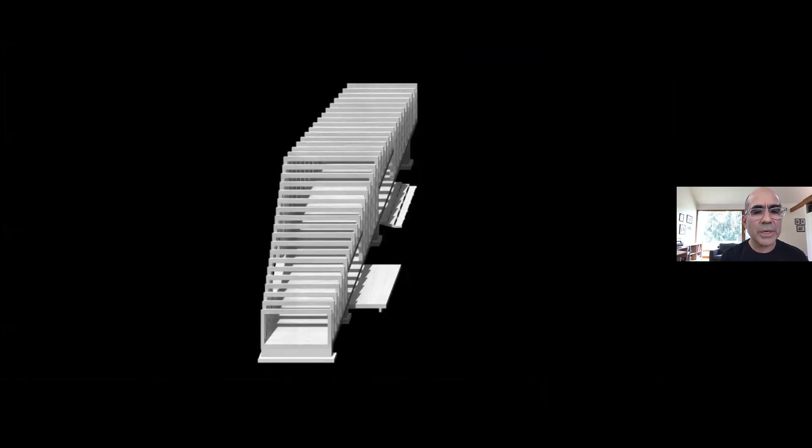View of the interior. For this project, which was on a large wooded site on the water, we were able to design a boathouse which opens up to the water. And this is a drawing of that boathouse and an interior view.

One of the wonderful aspects of working here was that there was local craft, very much because there's boat building, ongoing boat building in the area. And this was one other small outbuilding for the same project.

In 2018, I was invited as one of 10 architects by Francesco Dal Co to contribute a chapel design to the Vatican's entry at the Venice Biennale. While far from home, I sought to approach this project just as I approach all the others, starting first with a feel for the site and a sense of the locale.

We use very modest materials and an overall general modesty of approach. I wanted to design something that was very easily constructed, something that could be moved after the Biennale to the mainland. That was a suggestion that the chapels would find a new home in places of need.

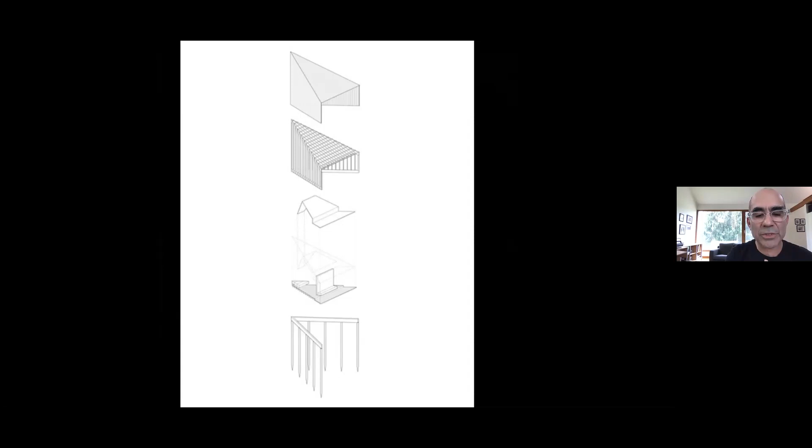The facade here is a porch, and the porch makes a public space. The porch has this long bench facing outward. The interior is a space for one to sit in the light, surrounded by darkness.

This is a view of the light coming in through the canopy of the building, but it is not visible from inside the building. And a view from the exterior with the lagoon to the right.

Earlier this year, we found that the chapels were actually protected by the Italian Ministry of Culture. They have been made permanent. They're going to remain in Venice on this site, and they're going to reopen to the public within the next couple of weeks.

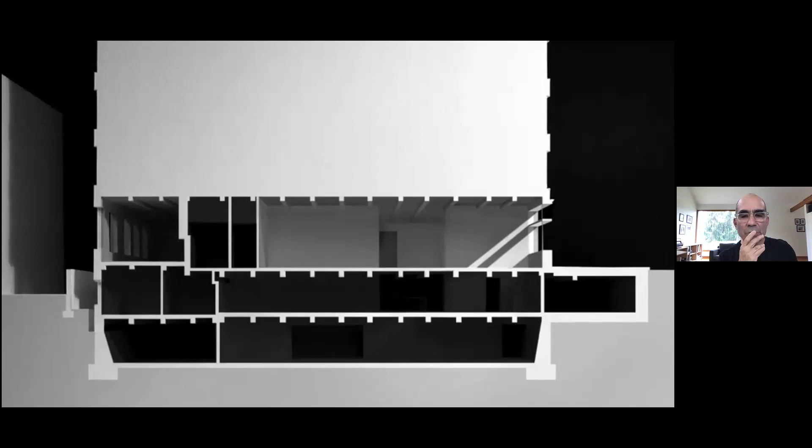With that thought, I approached the project here in a section showing the 3 floors, the ground floor at the top, and the street to the right, and removed sections of the concrete and the floor slabs to create double and triple height spaces. In the process, this allowed light to enter into the full depth of the space. And in this way, usable space was created where previously there had been no real space at all.

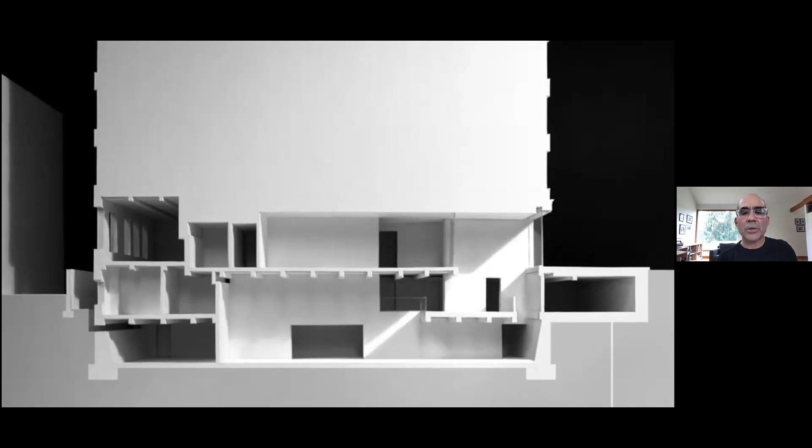This is a view from the lowest level. The space on the right is the lecture hall and workshop space. It's typically used for a lecture 2 or 3 times a day. From this space, which was about 21 feet below the sidewalk, one can look up at the street, at the sky, and engage with the city.

Our next stop is the borough of Queens. Queens is the largest borough of New York City. Manhattan, of course, is famously an island. Queens is really much more of a continent. It has the most linguistically diverse population in the world — somewhere around 130 to 140 languages are still spoken there. It's also very much a place of industry in the city, and it's culturally fertile.

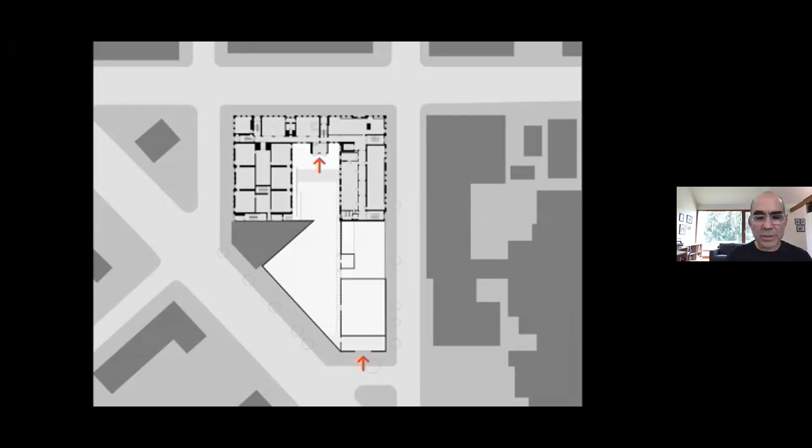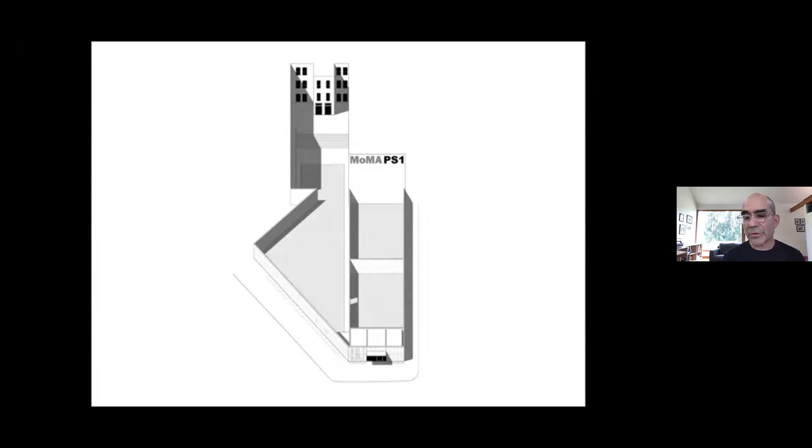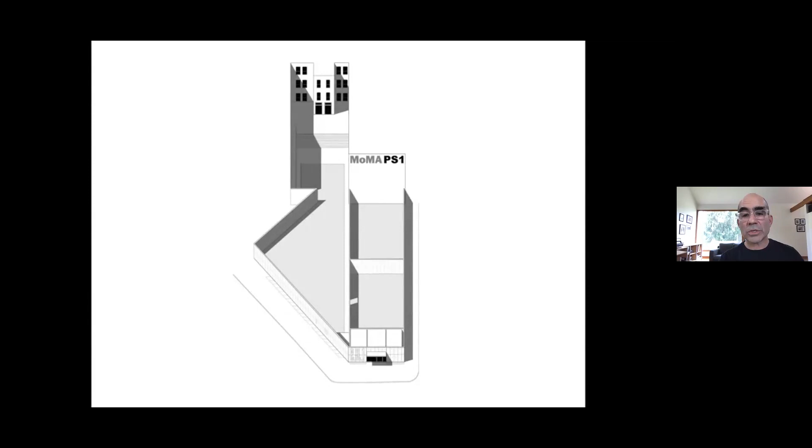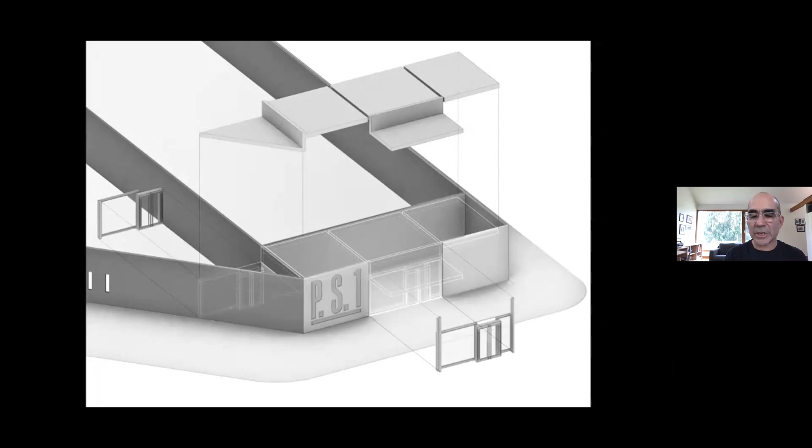This is a diagram to show what was there: a series of walls. To the walls, we cast a concrete roof, a concrete canopy, and we designed glass and steel doors to fill the gaps between the concrete walls. Here the clear elements, separate materials, come together to form a whole.

So the new entry experience was intended to be very much a densification of the actual qualities of the site, as well as a clear entry. And this is a photograph of the project completed.

The monumental glass and steel doors were designed very much with the unique programming requirements of PS1 in mind. And the large doors can be opened up specifically for book fairs and summer music festivals, where the daily visitorship might go from 100 to 600.

The natural light is the mechanism for leading one forward once entering the building, and it's what animates the very austere interior. It's a wonderfully geometric, very abstract landscape. We sited and made decisions in order to really highlight those embedded qualities that were there but not fully realized.

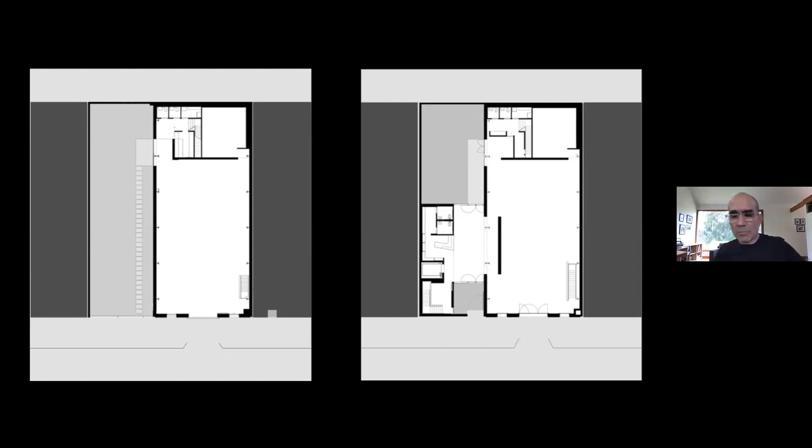The plan on the right is what we created, which was to build a small 2-story building in the lot on the left, plugging in, if you will, to the original great space. The large space was really wonderful for the showing of art, but the Sculpture Center did not have the support spaces necessary to really make for a complete museum or gallery environment.

It also did not have any of the kind of sequencing and timing that I think is important for arriving. So we took all these issues into account.

Another very important aspect of this project, as you can see in the plan on the left, was to open up and connect to the basement level, which is an incredible series of elongated spaces that were built, very purpose-built for the previous industrial purpose.

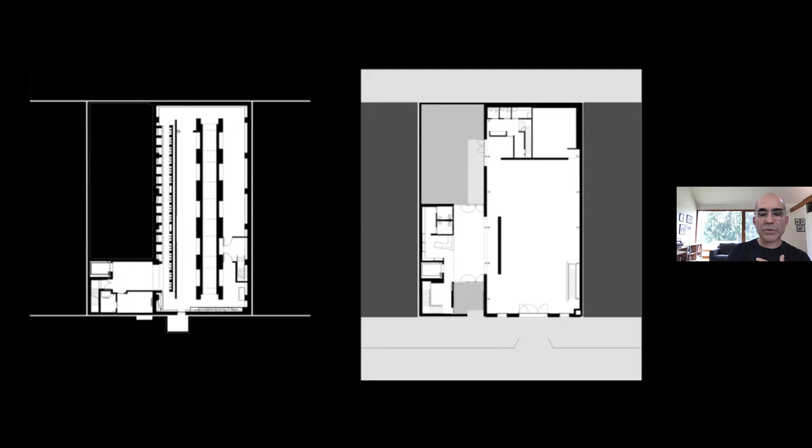So the section of the original building on the left and our project on the right, you can see the 2-story addition, how it plugs in both laterally and in section.

So the entry to the Sculpture Center is through the space between new and old. The gap is marked by the joint between 2 materials, brick and steel.

And the architecture is designed in a small space to allow for this kind of slow process of arrival and revealing of both the spaces within, and then more importantly, of the art that will be encountered.

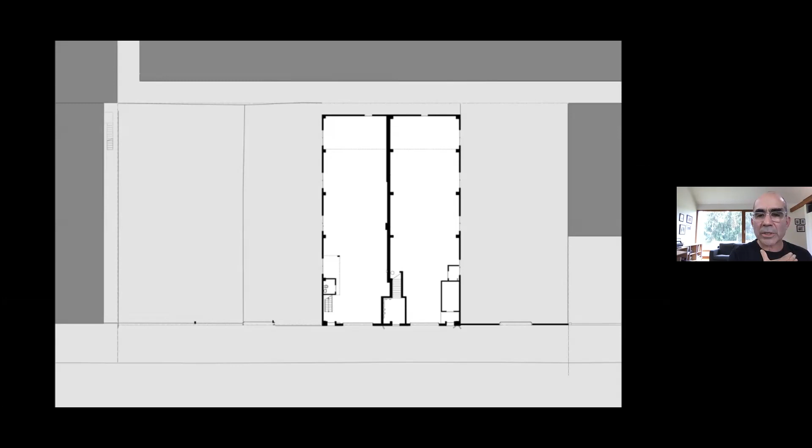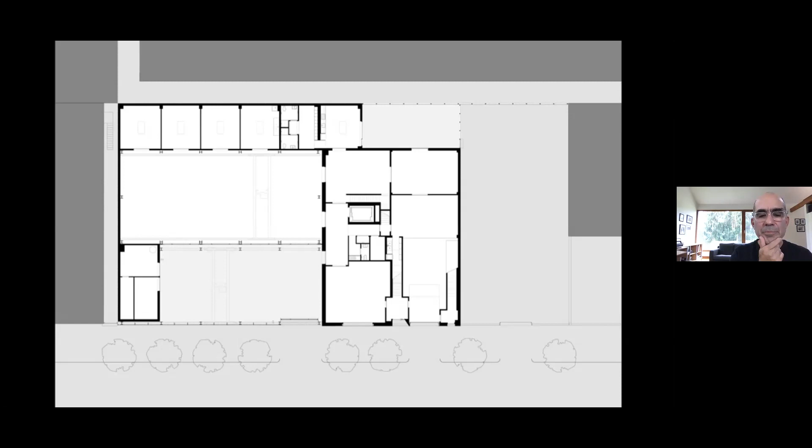In this drawing, you can see the old building in black, onto which we grafted a series of new structures. So the overall strategy here was additive, and that resulted in an assemblage of different elements that make a whole, and this whole becomes very much a part of the streetscape.

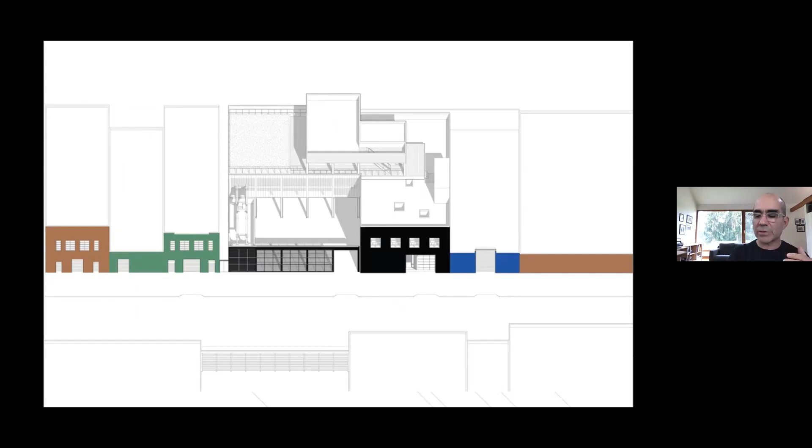This assemblage is both closed and open. Most of the local manufacturing buildings are very closed, very fortress-like, and it was important here to create a sense of visual porosity, to be able to see in and see much of what was going on.

Barry, to his credit, was very mindful of the quality of the spaces, not just for the work, but also for himself and his team, as they spend long hours doing what they do.

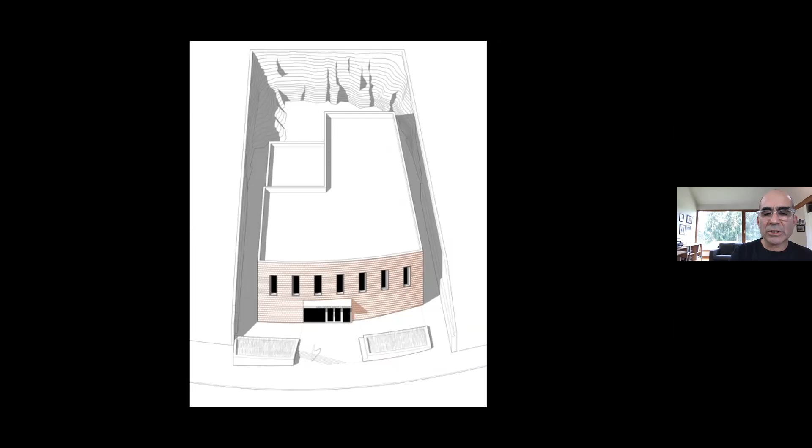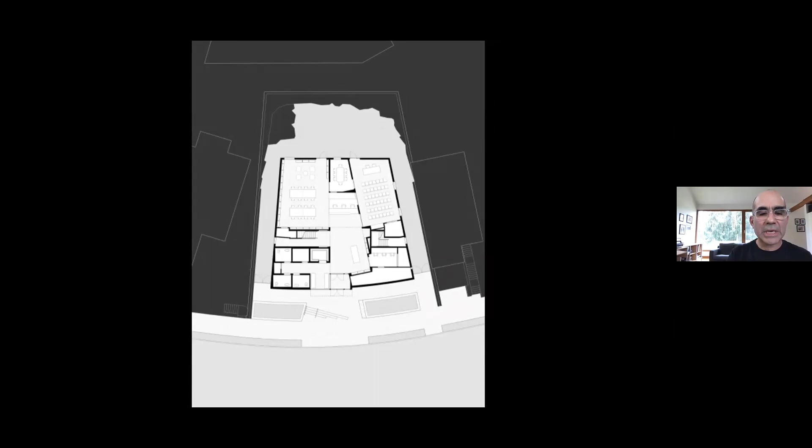What we did was completely gut it and imagine it as a series of public spaces. On the second floor, we created teen and children's spaces. The new facade is clad in terracotta shingles, and the stratification of the facade engages with the geology. The shingles themselves have a certain rhyming quality with the brick, the stone, and the slate of the neighborhood.

On the second floor, the children's room, and beside it, a teen space. And with the children's room, we created a series of window bays for seating for two.

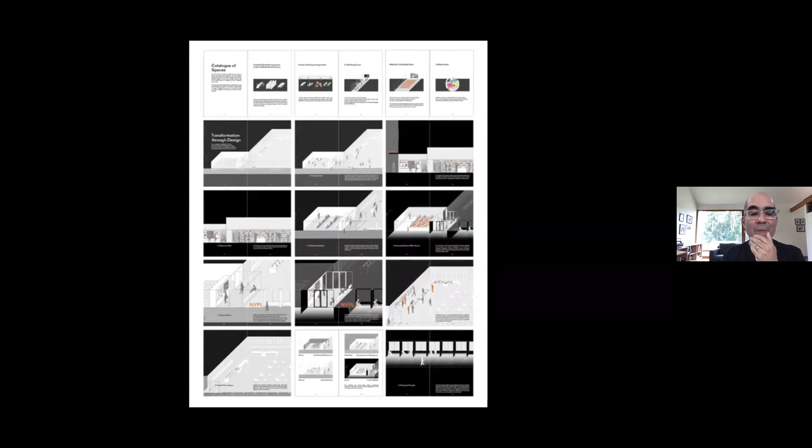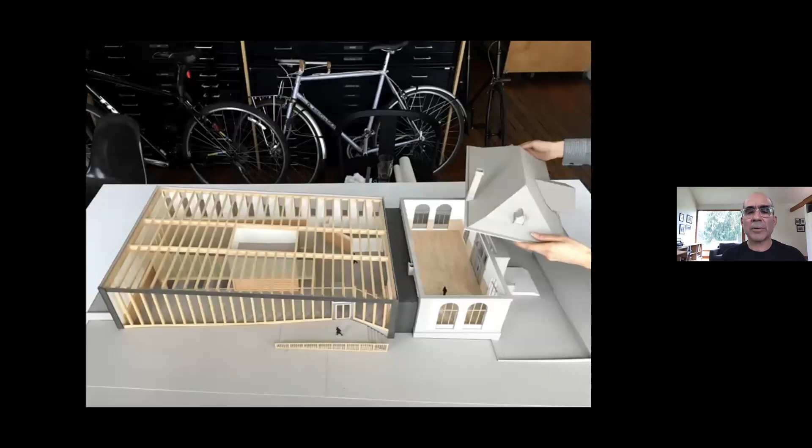So by the end of this process, we simplified the plan to its essence. I show this model because we work heavily in models, and we often just photograph the models in lieu of renderings.

Here you can see the neoclassical building on the right and the new structure on the left. The new structure is out of glue laminated timbers. This was an architectural decision, but very much also a strategic decision. It allowed us to build off-site under a controlled environment to elude low bid contractor conditions. And the wood becomes an expression of the library, an expression of the architecture, and a way to knit old and new together.

And the library is now one grand public space under a unifying wood roof. Natural light fills the space. This is the central core of the library. The core contains the community room, as well as service and mechanical, and it acts to help both separate and connect the spaces under the roof.